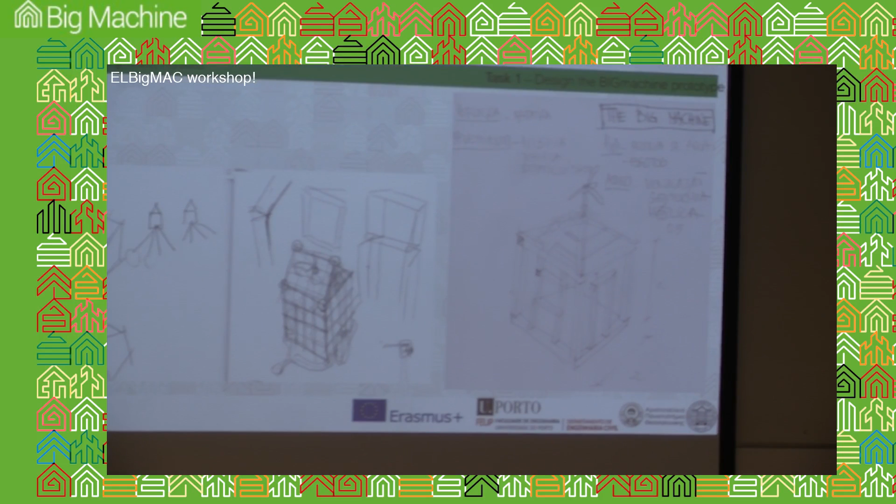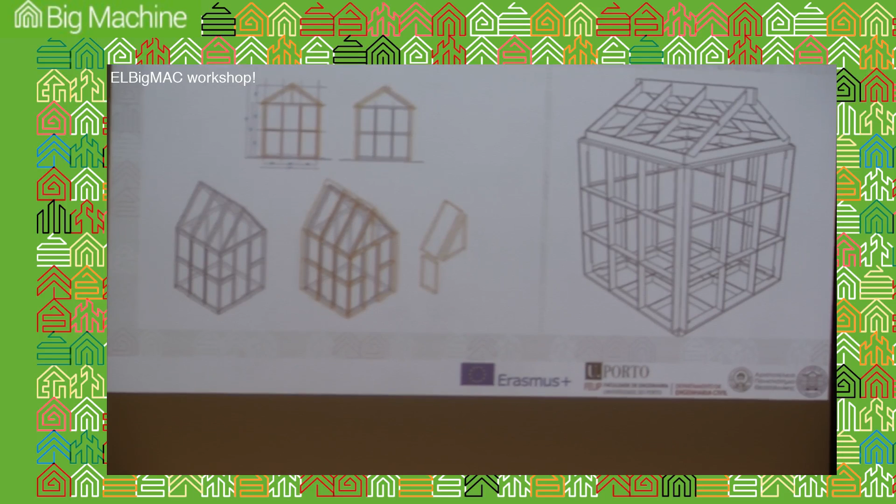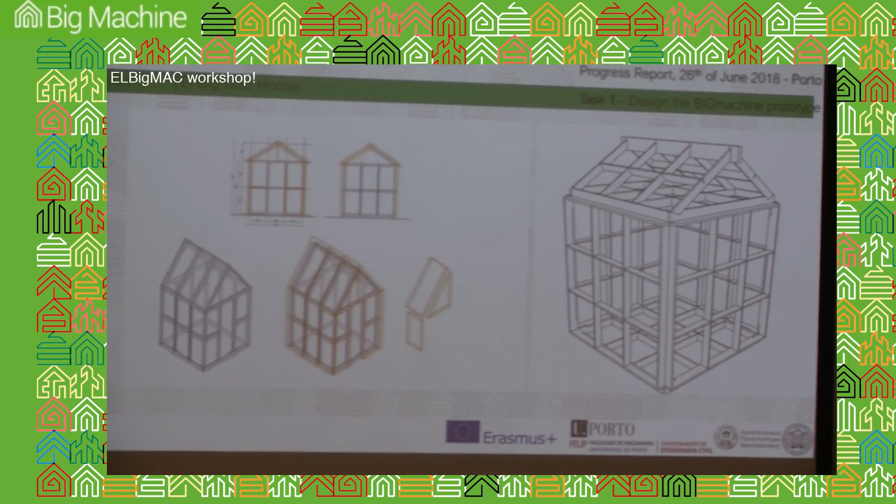With you during this week to make different wall solutions so they can test it and see if it's a good solution for a wall system here in Portugal. The other two houses, in Greece and in Croatia, will have walls adapted to their countries. The process started with the design of the house. We made some BIM models and AutoCAD models to test the construction. It's a really simple construction without screws—easy to make, so in any school, anywhere, someone can reproduce this house. We made some models, and finally worked with some carpenters.

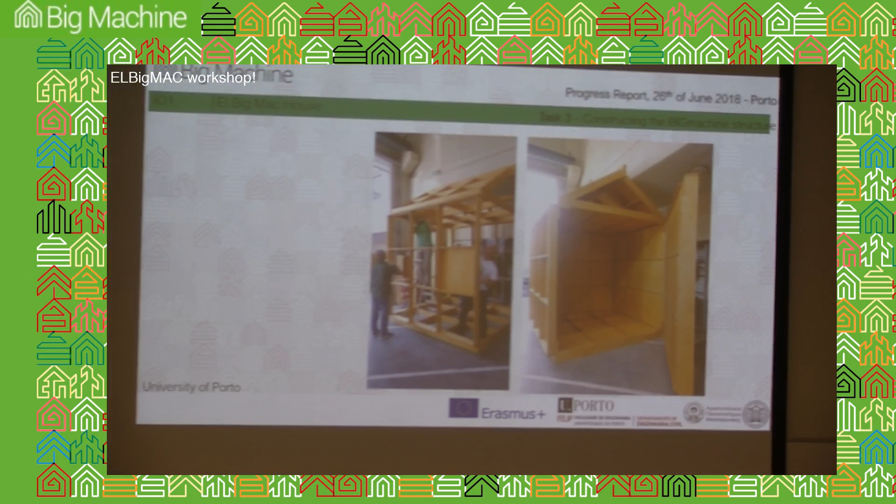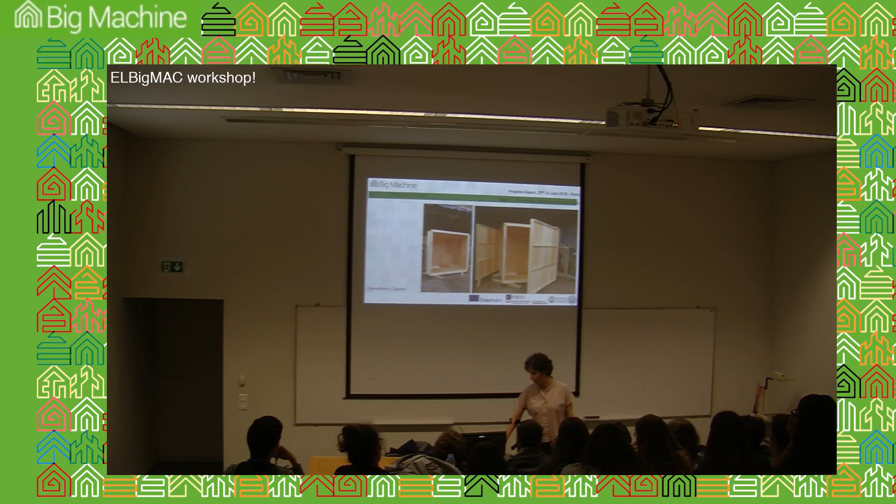We made the house in real size, a 2.5 meter cube. This is ours in Portugal, and this is the same house built in Croatia. Now the house in Greece is being built. We have a book with the construction manual for this house, where you can reproduce each piece—they are really easy to make, constructed like Meccano, not very difficult to build. Here you can see one of the activities we did with one of the schools; Clara de Resende is someone from that school.

We made a 1-year activity with them, and the idea was to make them feel the different phases of the project. First, they came here to our faculty. You can see it over there in the photos. We went to the labs and showed them.

We showed them the capacities of our labs, like the acoustic laboratory or the thermal laboratory, etc. And finally, we went to their school, and they made different proposals in groups for wall systems, and they had to show us, making a presentation like we're going to do after.

We made some workshops with them on sustainable construction in their school. We made the VR games that we made with you, so that they can choose the different materials in a VR atmosphere and see if they were the best solutions.

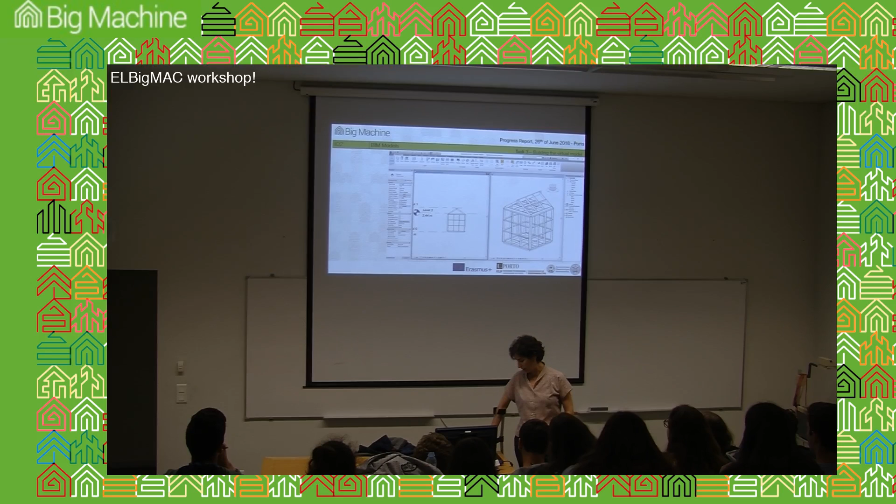We made this site where you can see our activities. We have been in lots of congresses, and one of the other outputs that we are working on is these BIM models. The idea is to make models of different solutions and of the house, so that we can give some workshops to our students.

For example, this is a manual that we are working on to give to your schools, so that you can make these activities that you have been doing this week. You can do it in your house, in your own schools.

Another output that we are working on is some interactive equipment. There are small pieces of equipment that we can use to show different aspects of civil engineering. I don't know if some of you have been in Mostra, University of Porto.

Do you remember our equipment? I don't think I saw it because it was last year. It was like this, last year. Yeah, they were there last year. I don't remember.

Well, the idea is we have different equipment that shows different things. For example, that one shows thermal insulation, I think we're working with it. This one is a table that we can use to make some structure and simulate an earthquake. And this one is a small piece of equipment that we can test and show how cable bridges work.

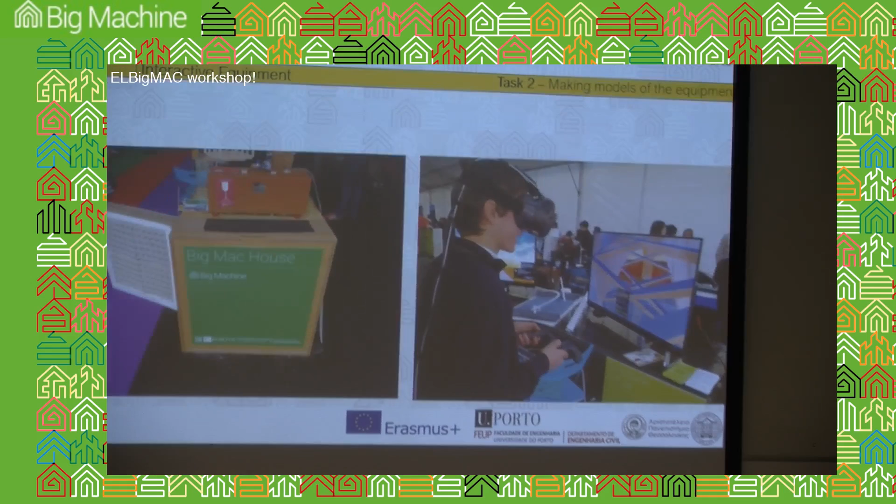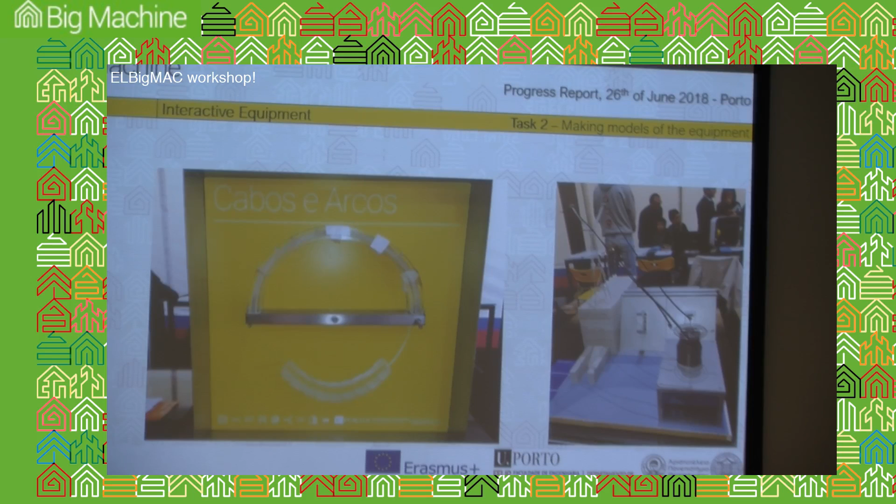And of course, in Mostra, we have the VR, which is the most requested activity in the exhibition. And here is some other equipment: this one shows how an arch bridge works, and that one demonstrates how a dam works. This activity, our partner Nikos from Greece, will show you.

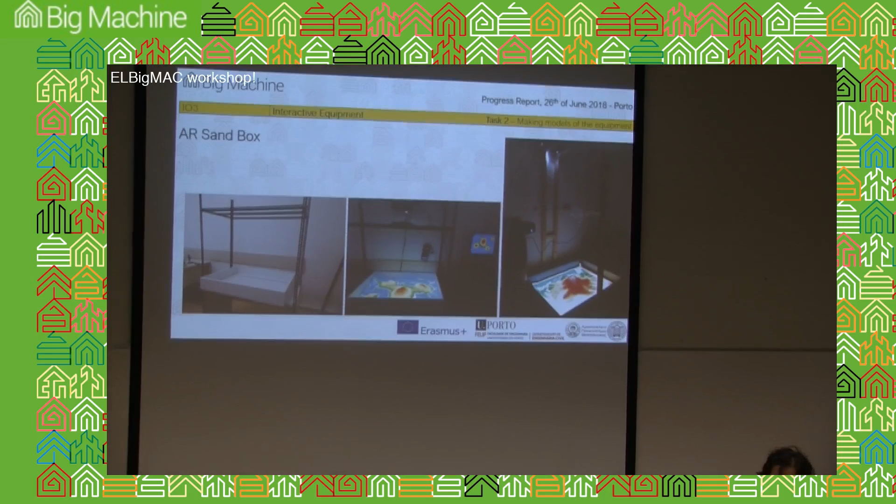This is really interesting. It's an augmented reality sandbox. What does this mean? We have this box with sand, and when we move the sand, the colors change like a topographic plan. And it's really interesting because when you stop your hand, the rain starts, so you can see how the rivers would flow over these mountains.

And now I think they are making the connection between these AR sandbox and virtual reality. That means that in Greece they are changing the sand, and here we can put the glasses and see what's going on. So this can open a really interesting path to our research.

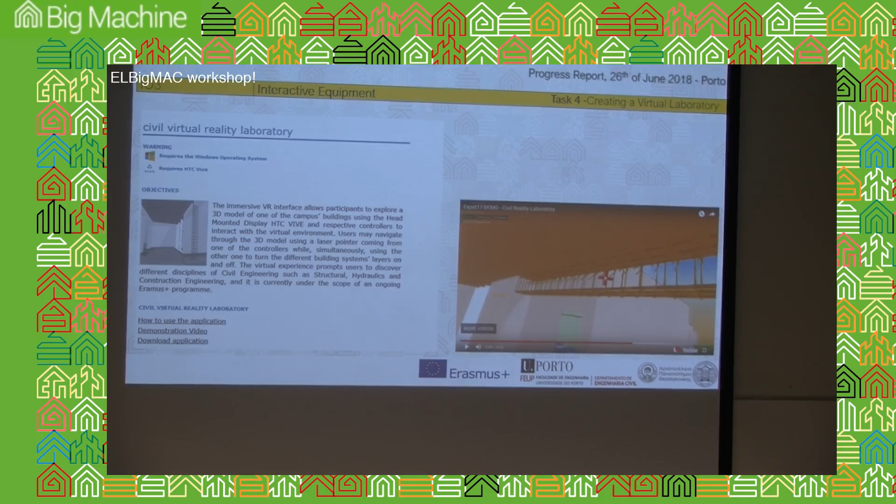We are making these handbooks so that they can be transferred to the secondary schools, and we are also creating a virtual laboratory where we are putting our activities.

Another activity that we are all working on is the QR codes. What is this? We use the QR codes - everybody knows what a QR code is. That's the Croatian partner that is working on this activity.

We use these QR codes, for example, on this wall, and when we scan the QR code, we are linked to a page that shows us what kind of wall it is. You have a 3D model where you can see all the materials that compose this wall and the specifications of the system.

This is quite an interesting output because we are working with our students here in the school. It's our second-year students who are now making some of these details of the walls. He will show you after, better than me. So finally, these details will go to a library where we will have lots of different wall solutions.

And of course the games that we are making, some of which you already used - the idea is to make games about this big machine and convert it in Unity, and we can use it in a VR environment.

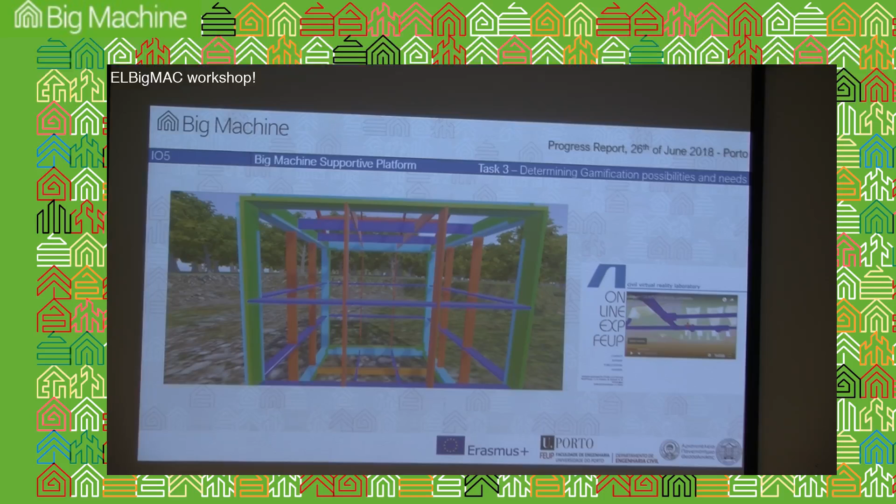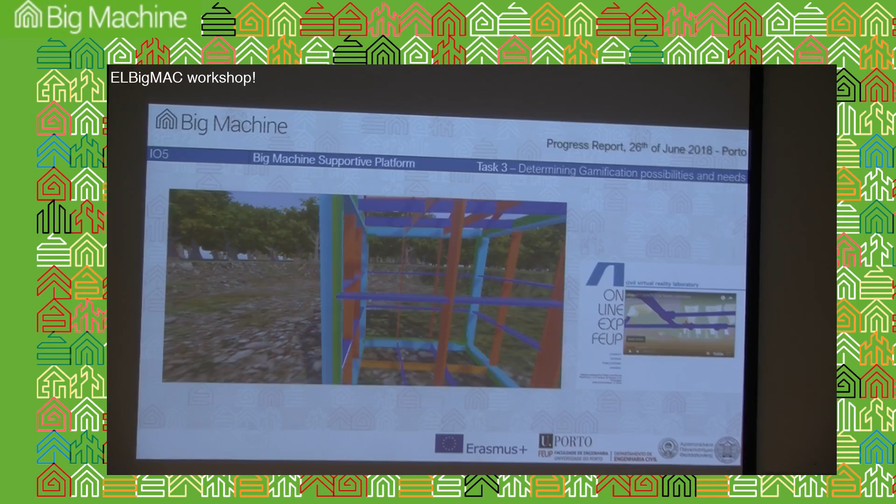For example, this one, we have our big machine house, and you can see which of the components of this house that we are using. You see, we click on a component, and it gives us all the details of it.

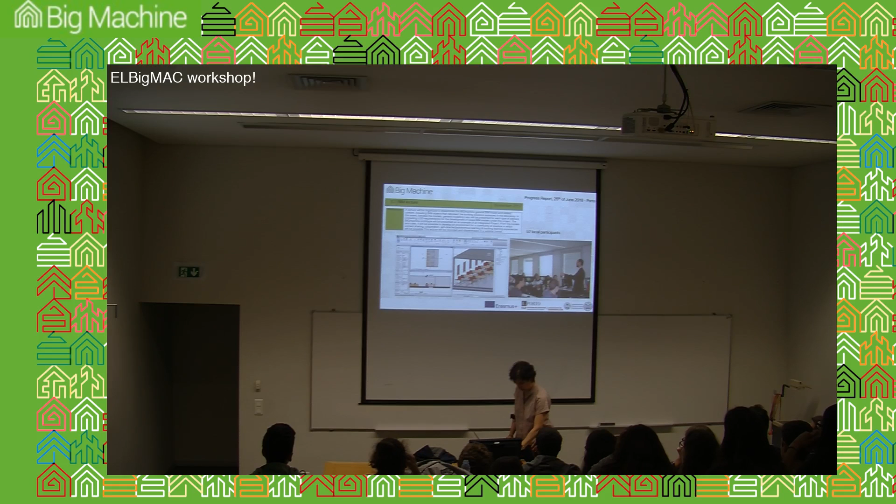The first one was a QR code lecture where our colleagues in Greece made an activity for secondary schools there, showing the capacity of this technology. And here in FEUP, João Pedro made a big lecture about this system to colleagues like you. And they made a small activity designing this room in Revit, a program that we work with.

And now the ones that we are making. Just to show you, we have visited more than 40 schools.

It was really interesting because we went to the office of Adão da Fonseca, who's one of the best Portuguese engineers that made bridges. He explained what a bridge is, and then they made the projects of this engineer that weren't built. So it was really good for him because he could finally see his bridges that were not built.

And then the students went, here are some of the images of that activity. And then the students went to SEI, that's a show by Câmara de Porto that connects universities and secondary schools, and they showed the activities that they made with us. This one of the bridges and this one of the house. This is when they came here.

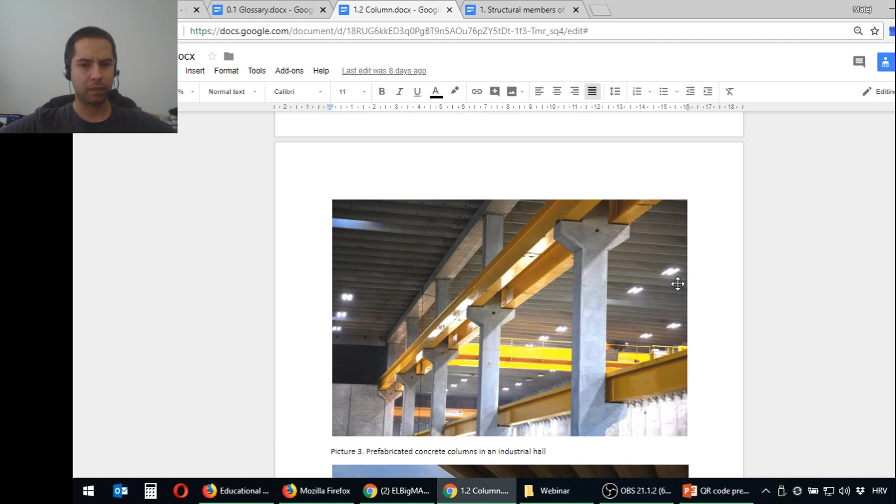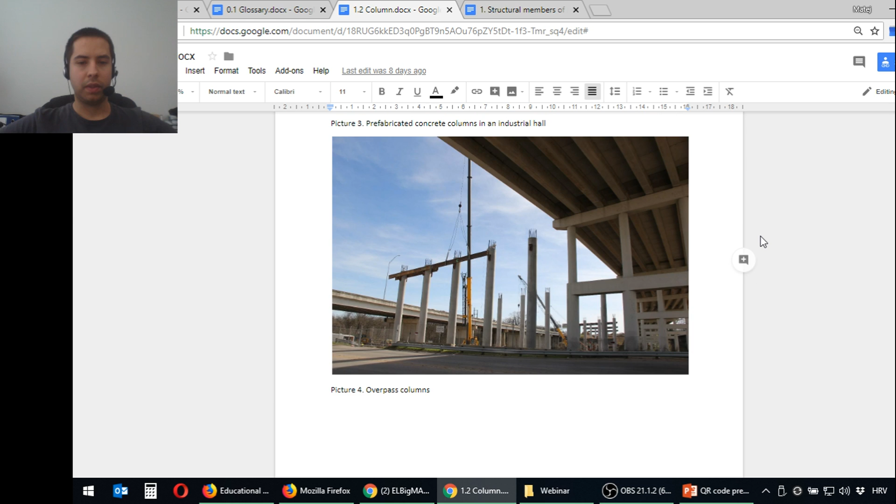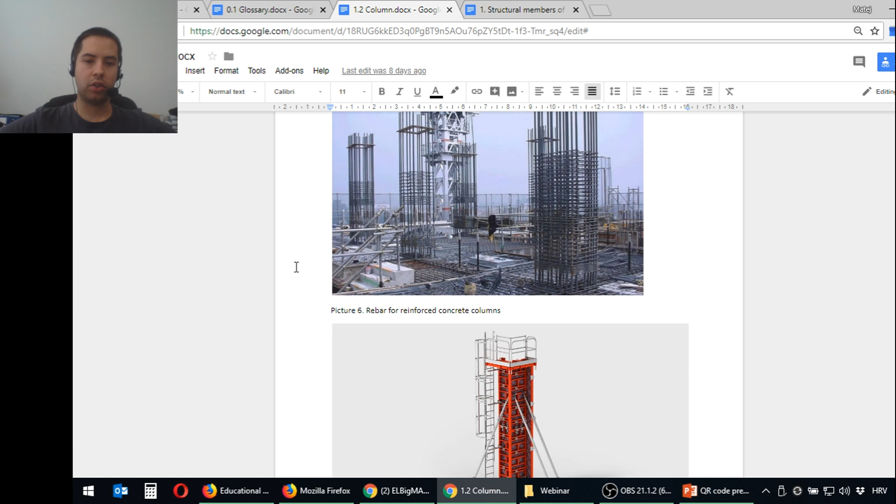This shows the shapes of columns based on how they are connected with other elements. We can see some steel columns, some prefabricated concrete columns on a bridge, or more specifically an overpass, ancient stone columns, and finally rebar and formwork, which are important elements in the construction of reinforced concrete columns.

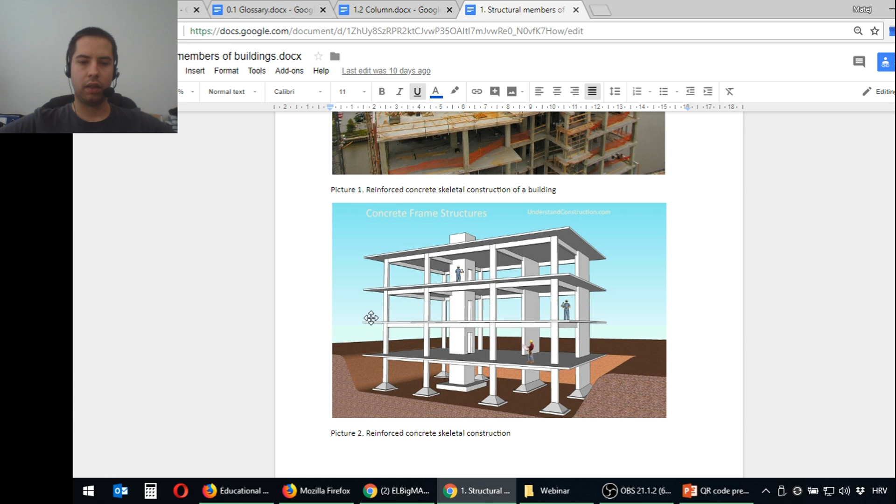So, as I said, I opened up the structural elements link, and if I open its own page, now I can see that the structure is similar: some general information, images. This is, for example, a structural system, skeletal construction of reinforced concrete, an example of masonry structure, steel structure, and others.

So that is that. Walls, for example, can be made out of bricks. I can open the page relating to the construction element. Brick is one of the oldest known construction materials. What can be made using bricks? We can make walls, chimneys, pillars, wall coverings, and so on and so on.

We also have some videos, for example a video of brick laying. It links to YouTube, so that I don't waste time showing you all the videos, you can all watch them yourselves by clicking on the appropriate links.